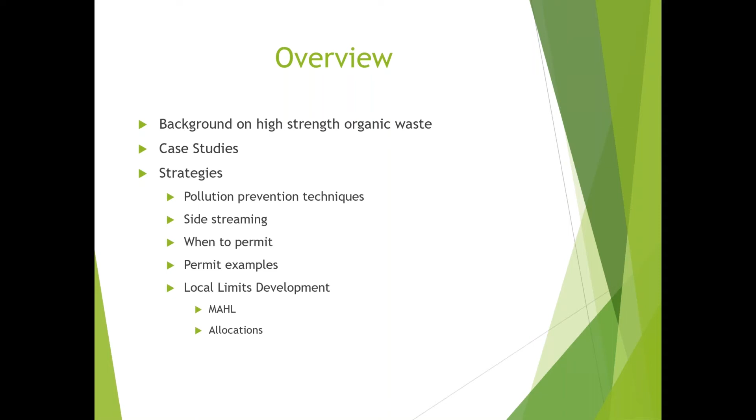All right, being serious here, this presentation is not to tell you what you must or must not do. It's just to provide you with some insight in order to help you better understand the impact of your industrial users on your system. It's your decision on how you handle or provide the oversight of the system. And again, we're not here to create policy. My talk reflects my personal position and not necessarily reflective of EPA's position.

So, get a couple little background slides out of the way here. Is the discharge a significant industrial user? Well, for most of the audience, and hopefully all of the audience, you've seen this about 4,000 times right now. Is the industry subject to categorical pretreatment standards?

Ironically enough, the industries we're talking about today, dairies, they're subject to 40 CFR 405, fruits and vegetables subject to 40 CFR 407, maybe there's a seafood processor, 408, feedlots, 412, and the slaughterhouses fall into 40 CFR 432. However, when you go back and look at all those regulations, although there may be an effluent guideline for that particular industrial sector, neither of those actually have pretreatment standards.

So technically, they're actually not subject to the categorical pretreatment standards, even though they meet the definition. Okay, so then we jump to this 25,000 gallons per day. I typically tell people to just throw that right out the window. You've got industries that discharge at 20,000 gallons a day, which is obviously less than 25,000, but yet they have a heavy load to the treatment plant. So throw the 25,000 out in most cases.

And also the third one here, the 5% of the hydraulic or organic loading. I was talking to someone the other day about this, and they said, well, they only discharge probably 3 to 4% of the organic loading at the POTW. And I said, okay, well, that's great, they don't meet that definition. But how many other breweries in town also discharge 3 or 4%? And so if you have 5, 6, 7 breweries, or dairies, or any high strength waste dischargers, multiply that times 3 or 4, and you're upwards of 30% of the organic loading at the treatment plant made up of industries, but you choose not to regulate them or provide oversight because they technically don't meet this definition of 5%.

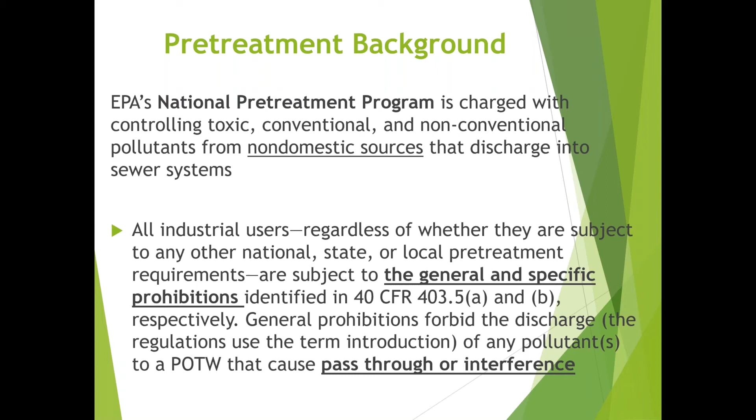All right, I'm done with the 403 references and slides now. If I show another slide or reference 403 here, just reach right through the screen and just punch me right in the face, okay? Please do that.

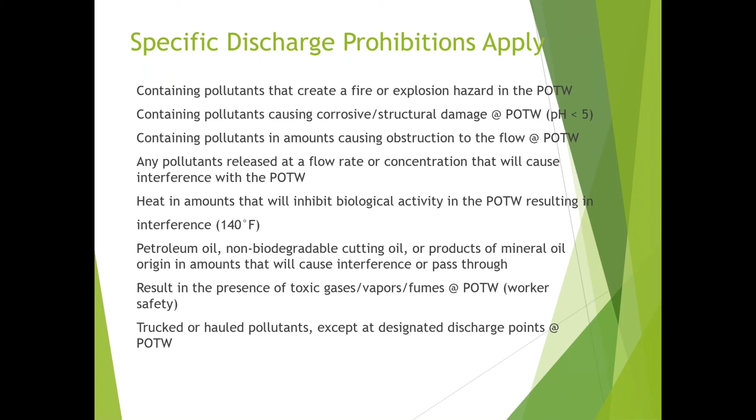Regardless of whether or not they are a significant industrial user, the specific prohibitions all apply. And I'm not going to go through these. You know where to find them. Bang, back in 403. Again, all industrial users are subject to the specific prohibitions.

So the $1 million question here I get all the time is, should I permit this industry? And my very simple, easy response back to them, and it's very sarcastic, is to say, how the heck should I know? You just asked me should I permit the brewery, or should I permit the dairy, or should I permit the slaughterhouse? So the long answer begs to go back to many questions, which I start to pose to the POTW.

And first and foremost is, what are the BOD and TSS concentrations at the industry? Do you know that? And they usually say no. Okay, so I say, well, if you don't have any data on them, what are they expected to discharge? So these are questions that you need to ask yourself. Do they have a brother or sister facility across the state or somewhere else you could use as a baseline for some of the loadings?

Have they ever sampled them? Have they ever submitted any monitoring data or any information as to the characteristics of the waste stream? Have they submitted a permit application to identify any other waste streams? Do they have any P2 measures in place? I can go on and on and on. Does the industry have any wastewater treatment in place? And if so, is that acceptable? If you do have any data on the industry, is the industry complying with your industrial local limits? Do you have local limits?

And then, once we get off that kick, I start asking them, well, how about the POTW? How are they performing? Can you handle the loading that this industry is going to give you? Are you meeting all your NPDES permits for your conventional local limits? More importantly, are you approaching 85% of the design capacity at the treatment plant? Because guess what happens when you reach 85% of the capacity? That triggers the city to develop a facility upgrade plan.

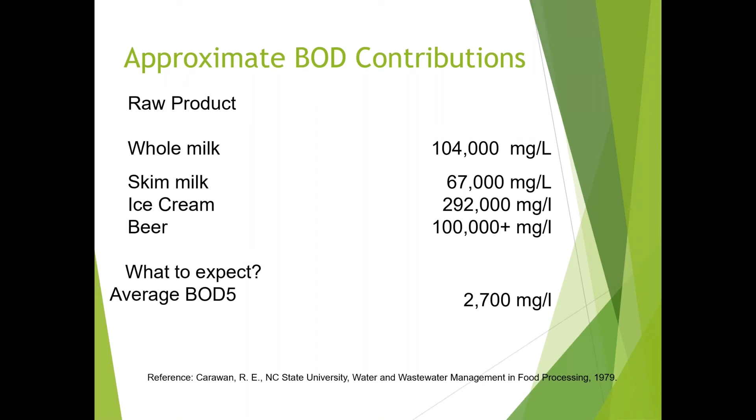But typically what you could expect from a high strength waste discharger on average with good BMPs in place, roughly 2,700 milligrams per liter. But again, that's going to be all over the place. What are your impacts to the wastewater treatment plant, the infrastructure, et cetera? You know this better than I do. High influent BOD, TSS, the process upsets, odors at your facility, increased costs. That's the huge one right there.

How about the blowers in the aeration basin trying to keep the DO levels up? Electricity is the #1 cost at the treatment plant. And then last, but certainly not least, the possible NPDES permit violations.

My kids have been watching Ghostbusters all weekend long, so tribute to them.

I sit here and say, who are you going to call? EPA enforcement, because that's what happens, right? EPA enforcement is going to come, or the state is going to come down on you. When you violate your NPDES permit, chances are, unless it's directly impacted to the industry on a potential pass-through interference, they're going to come after you.

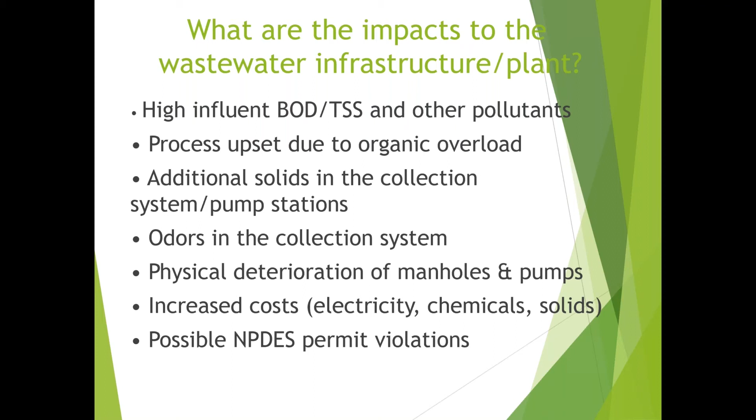Valley Crest Foods here was regularly discharging wastewater to the sewer system that caused disruptions at the POTW. The creamery processed raw milk, turned it into finished milk product. They had clogs in the lines. Occasionally they would drain these clogs and slug loads would go to the POTW. The facility was regularly discharging these slug loads that interfered with the disinfection process at the treatment plant, causing elevated

bacteria levels, to no one's surprise, violating the NPDES permit limit, and apparently on several occasions, the level of bacteria in the river was enough for the public service announcements to basically say, avoid the river altogether. And ultimately, the facility pleaded guilty to 4 counts of violating the Clean Water Act and had to pay a fine of $20,000 per violation.

So, quick case study here. This is Charles River Water Pollution Control District, and they're in Massachusetts. Somewhat older photo, but great time of year here. We have lovely foliage in New England this time of year. They are a 5 MGD design plant, so obviously the flow is a little less than that.

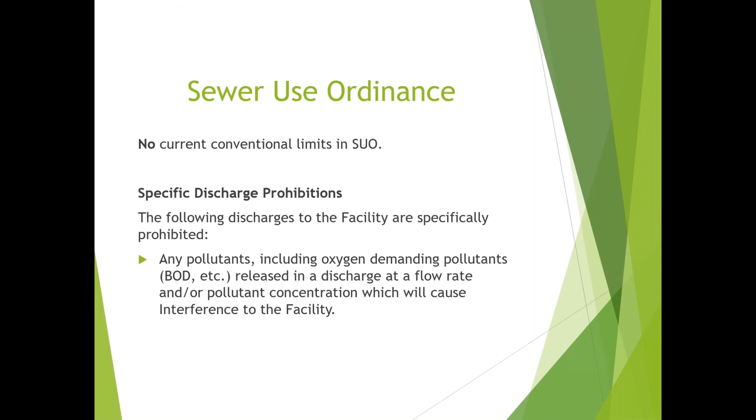So anyway, they didn't have any current conventional limits in the sewer use ordinance. They did have this language about the following discharges at the facility are specifically prohibited. It talks about BOD, etc. And here's some more information on the industry. It's about 450,000 gallons a day they were permitted for.

And note here, they did have an old standing CBOD limit in the permit for years and years of 2,000 pounds per day as a daily max and 1,000 pounds per day as a weekly average. So they did have a permit limit for CBOD.

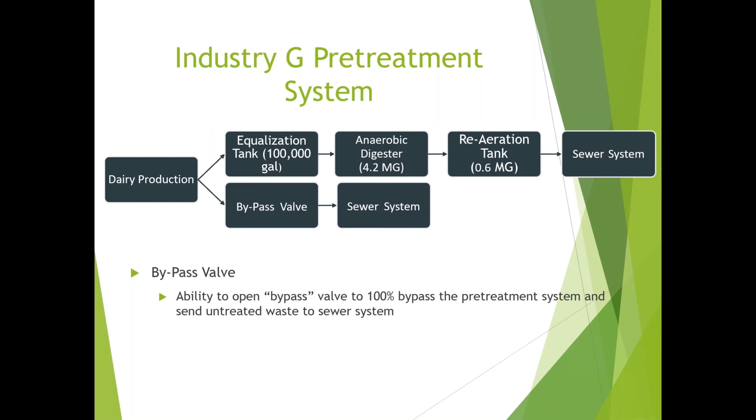This is an interesting slide because this is the dairy production wastewater that went to an equalization tank, anaerobic digester, re-aeration, and into the sewer system. But you see, they had the capability of going to this bypass valve and then directly to the sewer system. So that's always something to look for, and that kind of was an escape at the end of the day here due to the circumstances. But when you're doing inspections, you should also look for that, follow the sewer lines.

So timeline of events. Back in August of 2018, this particular industry, a dairy, had an identical plant across the state of Massachusetts that closed and decided they were just going to move all their operations to another plant, probably an hour's drive away, but decided they weren't going to tell the POTW. So almost immediately, the district started to see an impact at the treatment plant, high influent loadings. District put them on a compliance schedule.

Again, this goes real fast. Within a month, the industry had issues with the pretreatment system. They couldn't keep up with everything. To no one's surprise, there were odor complaints from the residents. The Mass DEP went out there and did an inspection and noticed that the digester had settling and gas buildup problems, etc. The industry immediately requested to open the bypass valve for up to 3 days, which would have essentially bypassed all treatment and sent raw dairy waste right to the sewer.

And the district, good for them, said, hey, we can't handle this untreated wastewater. No way. That's your problem. If you can't handle it, you got to find a way to treat it. So it didn't take very long. 2 days later, the gas digester membrane ripped, causing the sludge to overflow the tank and requiring them to unfortunately go to full bypass and send the raw dairy to the district.

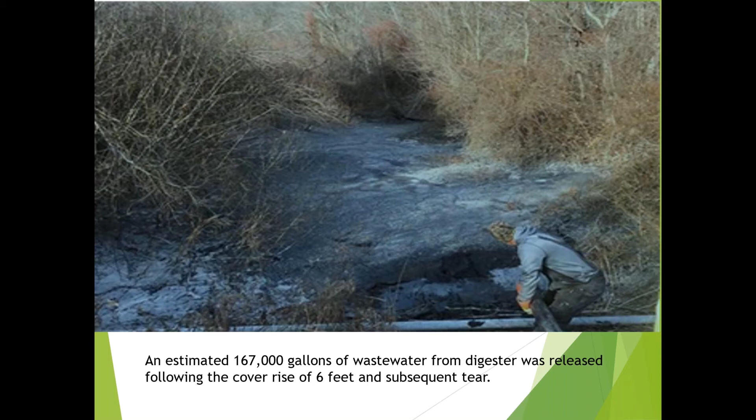And here's a picture of about 167,000 gallons of wastewater from the digester that was released following the cover rise of 6 feet and the obviously subsequent tear. So they got in big trouble here from the DEP. Why did this happen? Well, obviously many reasons.

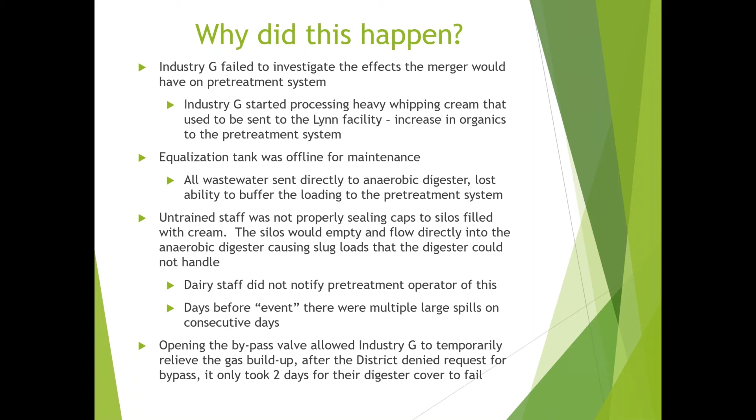The first, the industry started processing this heavy whipping cream that used to be at the other facility, increasing organic loading to the pretreatment system. The current system was not equipped to handle it. Ironically enough, the equalization tank was offline for maintenance at the time, so all wastewater was sent directly to the anaerobic digester, didn't have a chance to equalize, mix, lost that buffer ability, and they didn't have any training at the facility. They were just used to handling simple dairy waste. The dairy staff didn't notify the pretreatment operator of any of this, and obviously the membrane tore.

So the impact at the treatment plant, the aeration capacity was maxed out. I put the dollar signs in there. That's huge. Again, we go back to the increased cost at the POTW. The district was also wasting from the primary and secondary clarifiers, had to send off extra sludge disposal, extra trucks, added chemical, ferric chloride, and hydrated lime. Cost.

Surprisingly enough, the district was able to maintain compliance with this NPDES permit through this entire process, even though the BOD was at 148% of its design capacity. And as you see from the slide here, the industry alone was exceeding the district's design loading. So it goes back to show you about the design loadings and whether or not they're true and accurate.

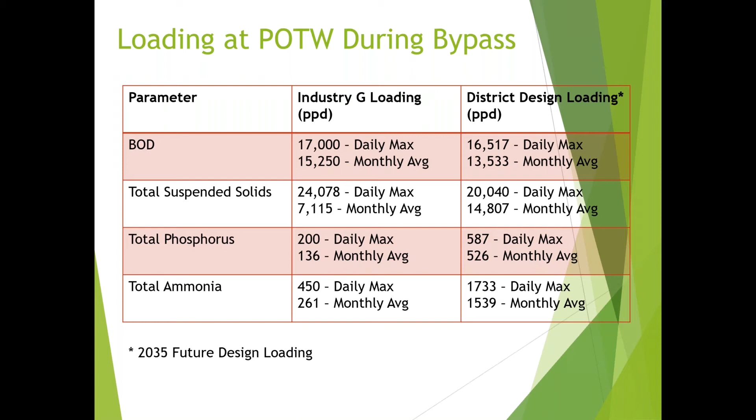But really, the only reason they didn't violate their NPDES permit was because it was in the November, December timeframe. Had it been in June, July, August, they would have had more stringent summer limits and probably would have violated those limits. So anyway, quickly, the district amended the permit to reflect the new sampling location and a bypass valve. The industry received approval to start adding hydrogen peroxide, to aid in the DO consumption, etc.

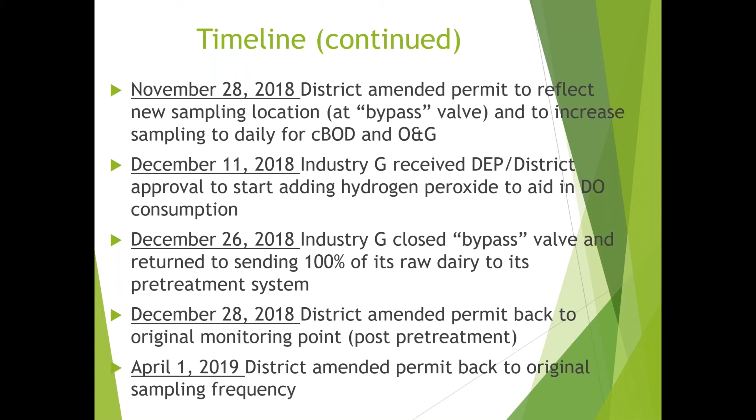And through this whole thing, they had 72 industrial permit violations during the period of November to January, and notification violations as well. And I'm going to go a little faster through this because I want to get to some of the other stuff. Ultimately, there was a settlement.

The key thing to note here is that there were 72 permit violations at $5,000 per day per violation. The POTW had in its sewer use ordinance language which stated they could charge up to $5,000 per day per violation. And they decided that they were going to go full bore with that, not take in $1,000, $2,000, $3,000, but go to the full $5,000 per day per violation. So 72 violations times $5,000 came out to $360,000, and they had a final settlement of $215,000.

So there was tireless enforcement here with the POTW. They relied heavily on the permit, the sewer use ordinance, the enforcement response plan. They used EPA and Mass DEP as assets. Another take-home message here for smaller POTWs is to continue to work with your enforcement staff, your city, town attorneys. You don't want the first time that you're meeting them to be when you have an enforcement action. Get familiar with them. And of course, there are many actions that were taken as a result of this industry.

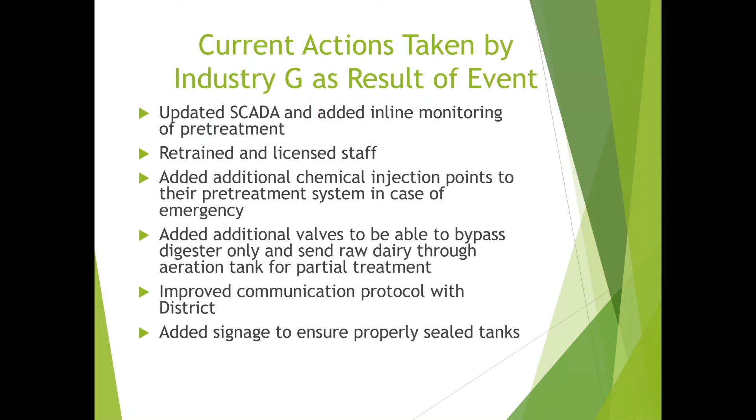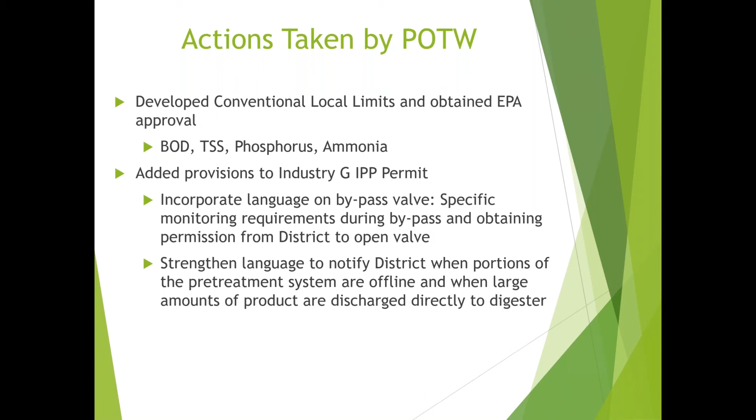Now, within the past year, the POTW has developed and has obtained approval for BOD, TSS, phosphorus, and ammonia, added certain provisions into the IPP permit. And again, I want to give full kudos to Kristen Liz out at the Charles River District. This was a very unfortunate incident. They handled it very well in a very timely manner. Totally unexpected. They were going down uncharted waters with this enforcement action, handled it very well, and got a $215,000 settlement out of them within a matter of months. So kudos to the district staff out there. And many lessons learned here, as you can imagine.

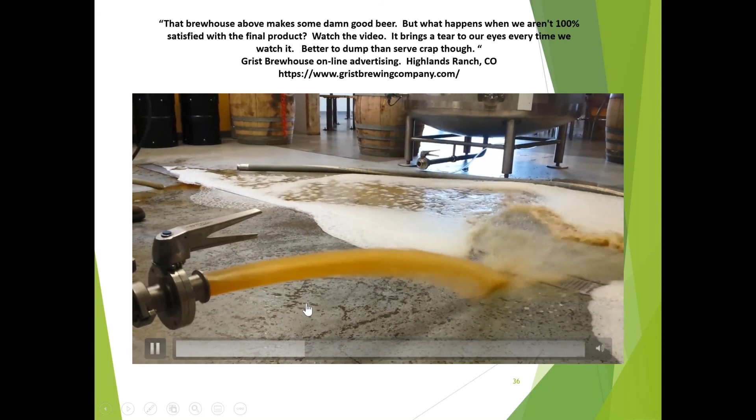So what's the big deal with breweries? I want to switch direction here, going from the dairies over to the breweries. Well, I'll show you this quick little video here. I don't think you're going to hear the sound, but I'll play it through anyway. You can read the caption here. Good friend of mine out in Colorado, Kurt, thank you for sending this out. Much appreciated. This is public information. This is no insider information here, taken straight from the brewing company's web page there. And I think there are many take-home messages here.

This particular industry was so concerned about making good beer. They said, it brings a tear to my eye every time we watch this. It's better to dump than serve crap, though. I've watched this like 5 times and I'm still chuckling every time I see it. I think, again, when you look at this, you have to say, who's the public relations person for Grist Brewing Company over there? I'm pretty sure that the facility was totally unaware that maybe one day some guy from Boston at EPA is going to be showing this video over a webinar to over 1,300 people about how I'm dumping raw beer down into the sewer system.

So I hope that they had effective pretreatment in place. I hope that that wasn't sent to the POTW directly. I hope that the POTW didn't experience any pass-through interference. But it really highlights the need for education on these significant industrial users. I would never want this to happen at my treatment plant. And again, so I ask you, should I permit the breweries? Well, if I have raw waste coming down my line of roughly 100,000 milligrams per liter, I think I'd probably want to regulate them, because there's always the potential for pass-through and interference.

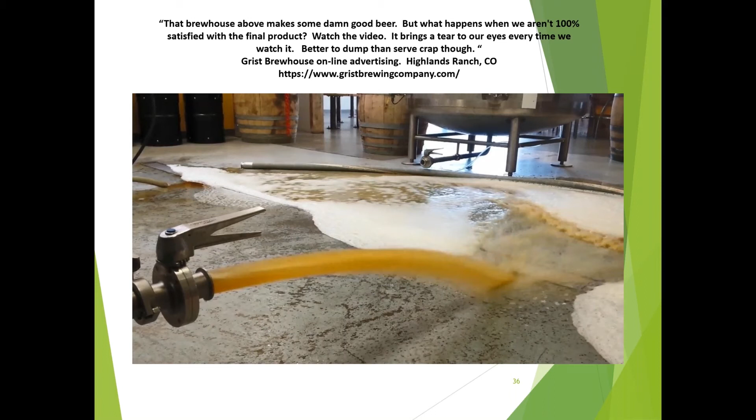So I'm not going to get into the step-by-step process here about brewing. I just did want to give you a little bit of a flavor of how the process works. Most of your side streaming, et cetera, is going to come from the mashing operation. That's where the milled grain is mixed with hot water in a large vessel, commonly referred to as a mash tun, where it's converted into a sugar-rich liquid, or wort. The wort is then strained off. Then you have boiling. The wort is moved over to a larger tank known as a kettle, where it's boiled again with hops, sometimes you'll add some other ingredients like herbs or sugars, and then it's over to fermentation and ultimately packaged and hopefully not dumped down the drain.

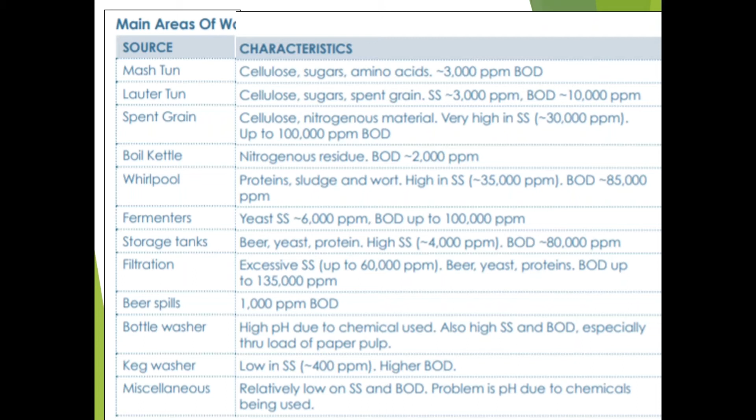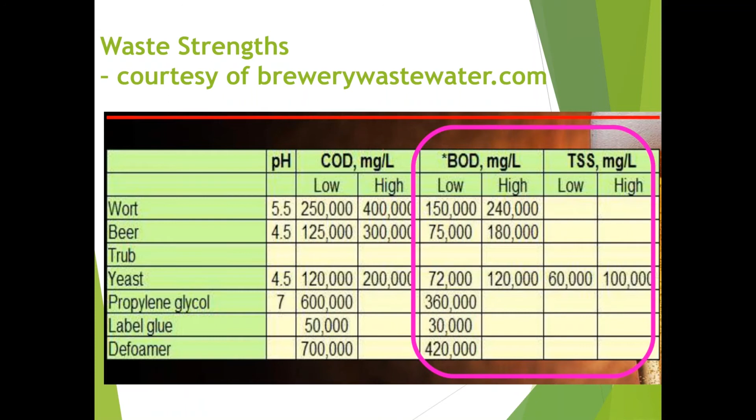And here's just really a slide to give you a flavor of where some of the high strength waste might be coming from during a brewery process. And again, this is from brewery wastewater. I want to put a few slides up here to show you where we are with respect to the high BOD concentrations. Beer, 75,000 upwards to 180,000 milligrams per liter. With side streaming, it's a very effective way to knock down that BOD, and mainly the solids.

Look at the solids level that come way down. BOD too, but it's really the solids. And this is data from Warwick, Rhode Island. Thank you, Betty Ann, who sent this over to me. This is real data from a real POTW. You see the pH numbers there, fermentation, wastewater results.

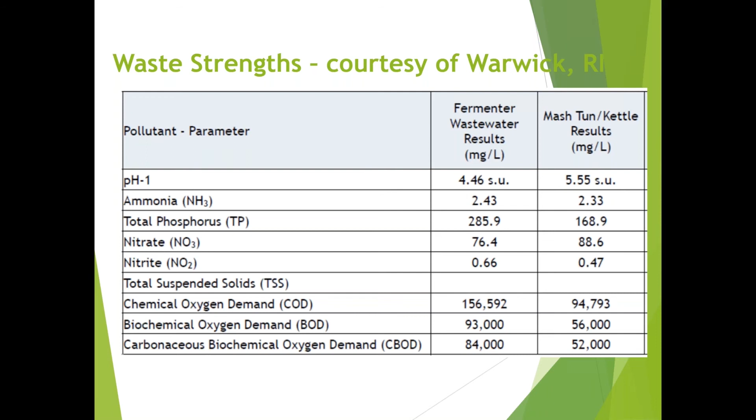Again, this is not going to the sewer system, but this is basically beer that is in process and sampled for BOD, but tells you that in the event that it were dumped down the sewer, that's what the numbers would look like. Again, BOD, CBOD, 50,000 to 90,000, very, very high numbers.

And I know we're getting low on time here, but I do want to show this video because I worked with a couple people at EPA. Thank you, Chris Beeling and Marco Rivera, who helped out with this video. And it's a video that was put together about a year ago now. And Laura, if you could get ready to load that up, that would be great. Whereby we went out to 3 or 4 breweries. It was probably one of the best weeks of my life ever working at EPA. And hopefully I'll tell you to turn the sound up here. And we put together this 7-minute video.

They say the camera adds 20 pounds to your face, and I certainly don't disagree with that after watching this several times.

But it's really a great video on side streaming, okay? And getting that waste out of your tanks, etc., in strategic ways, and also effective wastewater treatment. And I'm going to show you some examples, particularly the Alchemist video or process where they get down to incredibly low numbers. So Laura, if you could just play this video, that would be great.

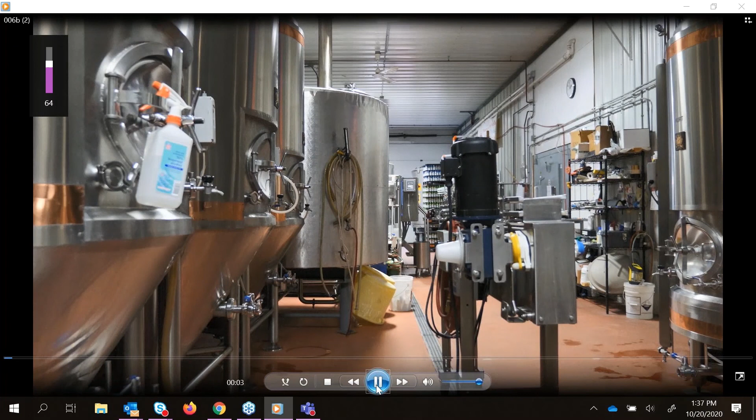Available capacity to handle high-strength wastes. Many cannot accept a large amount of brewery waste and still provide needed treatment services to the rest of the community. The municipal wastewater treatment facility is crucial in protecting Vermont's surface waters. They're the one receiving and treating this wastewater and discharging it to the river itself. So food and beverage manufacturers can indirectly impact Vermont's surface waters if they adversely impact the wastewater treatment facility. Our effluent from the brewery goes to the Stowe wastewater treatment facility. They discharge to the Moscow River, which leads into the Waterbury Reservoir, which discharges into the Winooski River, which goes directly to Lake Champlain. So even everything that we do here, we feel is part of our responsibility for the health of Lake Champlain.

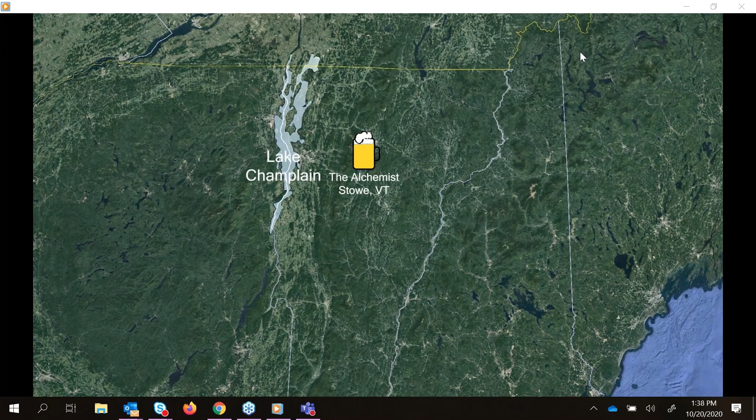So when you're designing a brewery, one of the things that a lot of people kind of step over is wastewater generation. You know, for us being in South Burlington was important because this is where our community was, this is where the brewery started, this is where our roots are. Wastewater facilities, the way I look at it, is a resource. If we have a facility that's discharging into our treatment facility, but they're not using best management practices, they're utilizing a portion of our facility that could be used as a resource for another facility to come in. When we first started, we didn't do anything. We just put everything out in the drain. That came to an end quickly when the local sewer treatment plant was in trouble. The brewery industry has become a fast-growing sector, and EPA is encouraged to see that many breweries have adopted best management practices in order to control high-strength organic waste from being discharged into our municipal sewer systems.

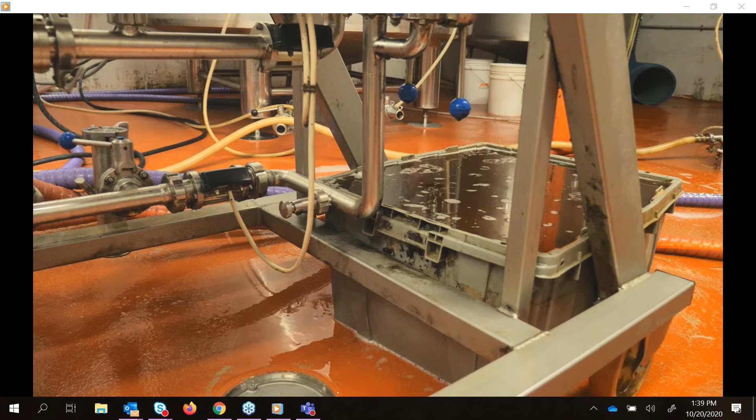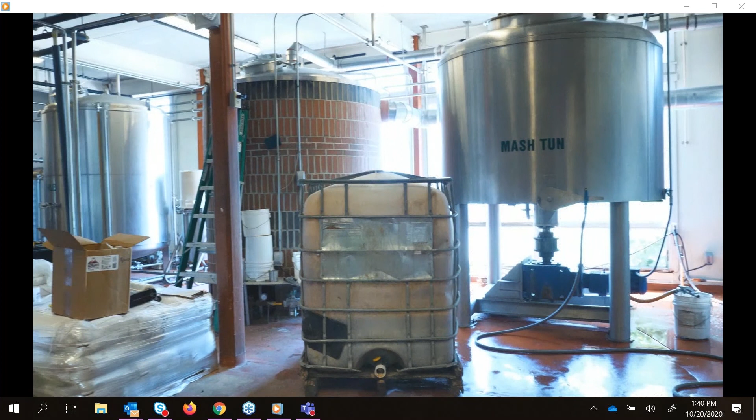And we're just careful about a real culture of trying to use as little water as we can. No beer goes down the drains. We recycle all the cleaning chemicals that we use, so we use them over and over again. Big bulk that's left over from the brewing process, of course, is the mash. When you take spent grain out of the mash tun, we load it into a trailer. It gets picked up on Fridays, and then goes to a dairy farm for the milking herd of some local farmers. Other parts that are left over is the yeast and also some of the hops that cows just don't like. So we put those in totes and we bring those to a local composting facility right in town here. Scott is describing side streaming. Side streaming keeps processed waste separate from wastewater. The wastes are then reused or more efficiently managed.

BOD, or biochemical oxygen demand, is a measure of the organic content in wastewater. An average American household produces wastewater that has a BOD of around 300 milligrams per liter.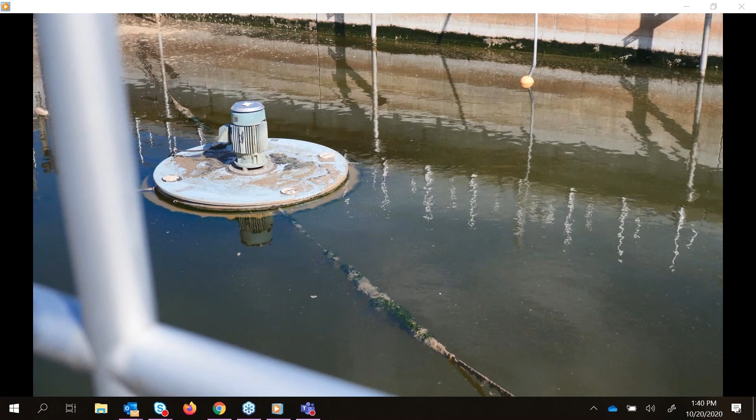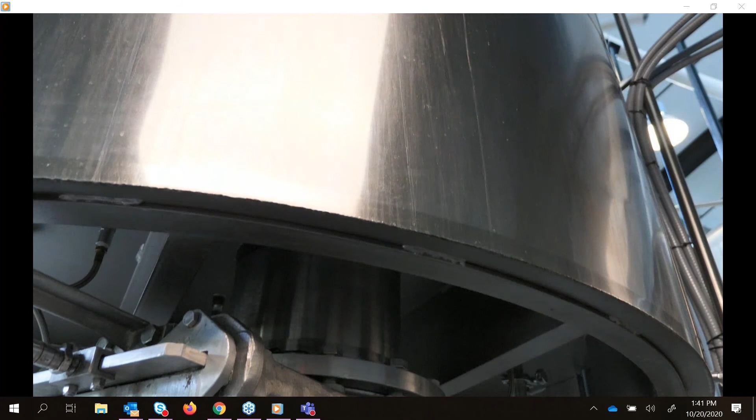Just before we started all of our side streaming at our Waterbury Brewery, our BOD load going down to the town of Waterbury was about 20,000 milligrams per liter. After really working on our side streaming and getting as much out as we possibly can, we average around 1,500 milligrams per liter. And that's strictly just side streaming, being very crazy about catching every drop of beer, all the yeast, everything we can. We catch it and get rid of it beforehand.

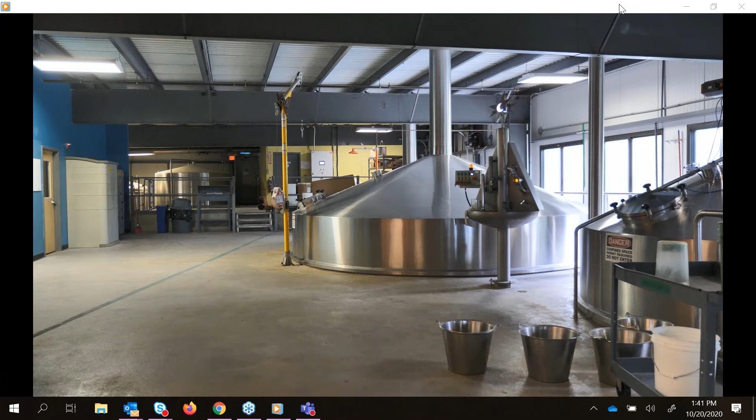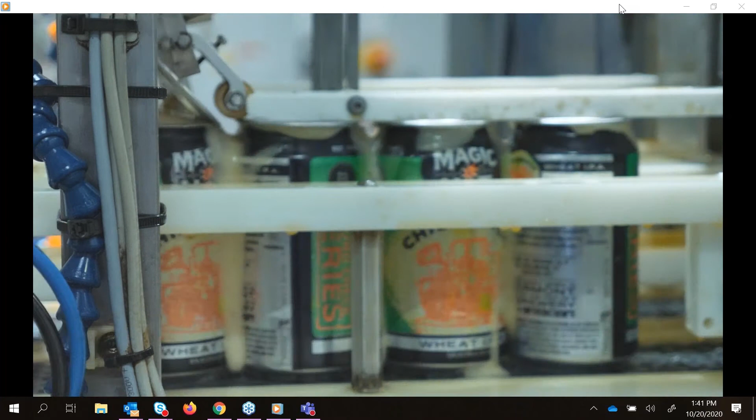Side streaming sometimes solves one problem but creates other challenges. So side streaming was a great process for us, but the amount of waste we were generating would necessitate a truck coming to pick up the rollaway tank every 6 to 7 hours, and that was just for our liquid waste. So when you add on another truck coming to pick up your spent grain every 8 to 12 hours, you're getting 4 to 5 trucks a day in and out of the brewery every day we were in production. So as production grew, that traffic flow was increasing.

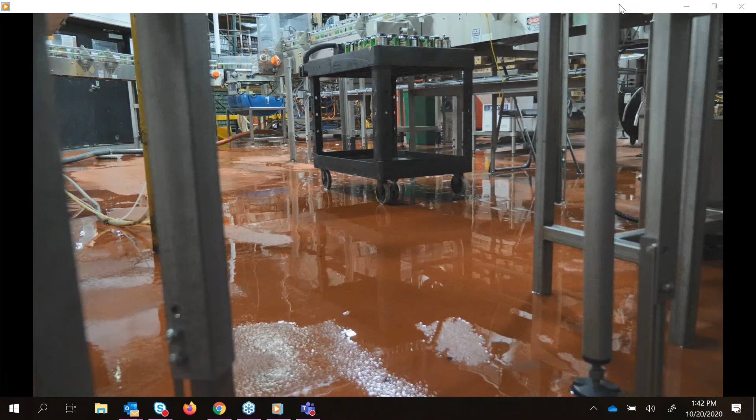Chris solved his process waste problem with an anaerobic digester. Anaerobic digesters make meticulous side streaming less important because all high-strength wastewater goes to the digester, where bacteria convert the organic material in the waste to methane gas, which can be used for heating or electricity. The pre-treated wastewater is then sent to the municipal wastewater treatment facility.

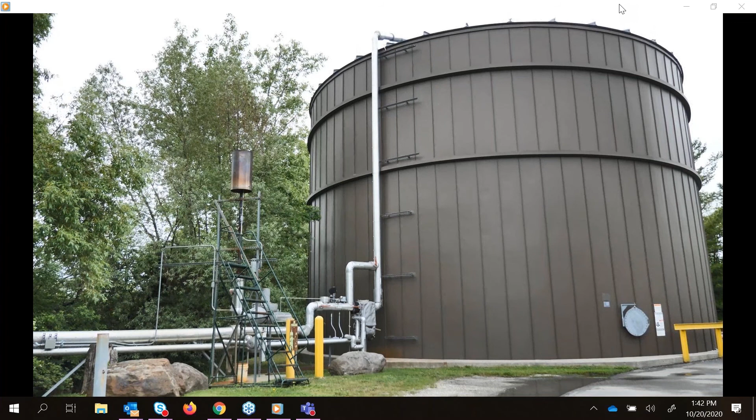So the anaerobic digester provides a number of benefits, not the least of which is a business benefit for us. We're able to eliminate the trucking cost of side streaming all of our waste, and we're able to cut our electrical costs by 60%. So those net up to a big savings for the brewery.

Spent grain can be hauled away and used as feed supplement for local animals and farms. And the dewatering process of the digester also creates a wonderful nutrient-rich fertilizer that we can then use for local farms as well.

Bioreaction, sometimes called aerobic treatment, is a more traditional means of treating wastewater. It works by providing oxygen to microorganisms to help them break down organic wastes. It can also help remove phosphorus and other pollutants.

The Alchemist uses this type of system in Stowe, Vermont. At our brewery here in Stowe, we practice all the side streaming that we do at our Waterbury brewery, with the exception being that we have an aerobic bacteria digester here in Stowe. So the digester needs a certain amount of BOD and strength coming through to support the aerobic bacteria.

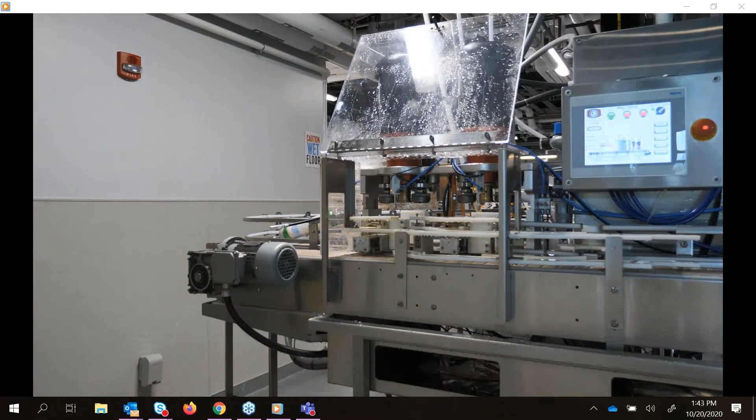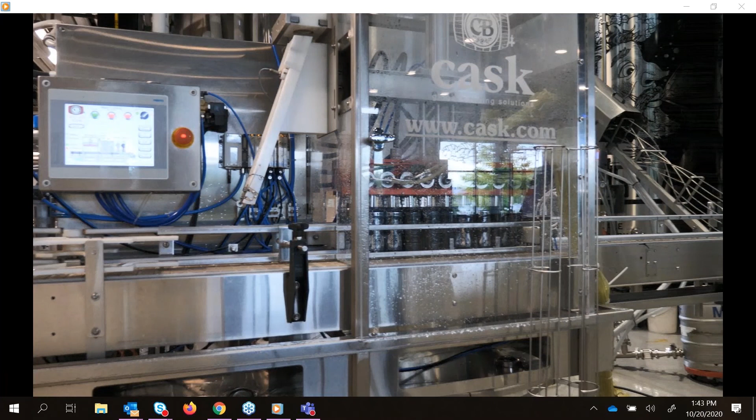So there are certain points along the line in Stowe where we don't practice the same extreme side streaming as we do in Waterbury. So our effluent coming into our wastewater pretreatment system will run about 4,000 milligrams per liter BOD, and by the time it's leaving the wastewater treatment system and going to the town of Stowe, it's down to about 0.2 milligrams per liter of BOD. That's over a 99% reduction of BOD. 0.2 BOD is about 1,500 times less than an average household discharges.

As far as the BOD levels go, the town's wastewater treatment system is getting surcharges, or just disposal charges, of over $80,000 to $100,000 a year because of our discharge, which they were happy to share with us. And so we were paying $80,000 or $90,000 a year.

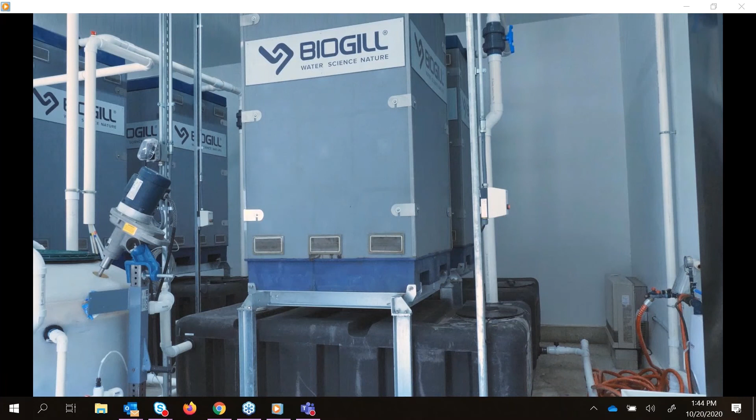So Scott began to side stream, but he still had to pay $60,000 to $70,000 a year in surcharges. He then invested in a pretreatment system and eliminated the surcharges. We've been able to get the BOD levels down to under 300 consistently, sometimes under 200. So the system will probably have about a 6-year payback for it.

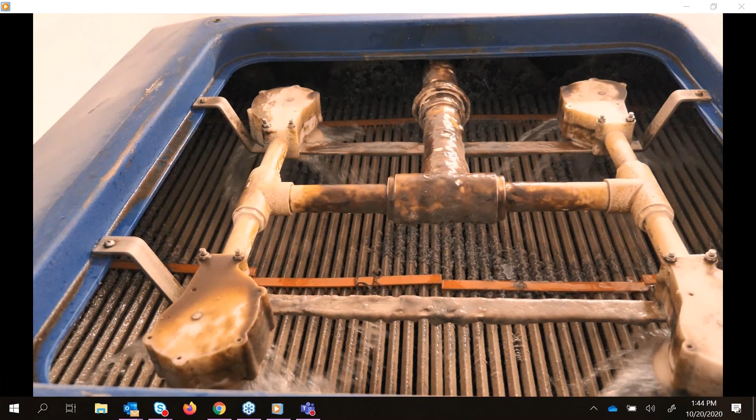In addition to high BOD, breweries can discharge large amounts of phosphorus, leading to harmful algal blooms and low oxygen levels that can harm aquatic ecosystems. We're having a real issue in Lake Champlain, our large lake, with algae blooms, and a lot of that is contributed to excess phosphorus. So our system here, we're removing 96% of our phosphorus load before it goes down eventually to Lake Champlain.

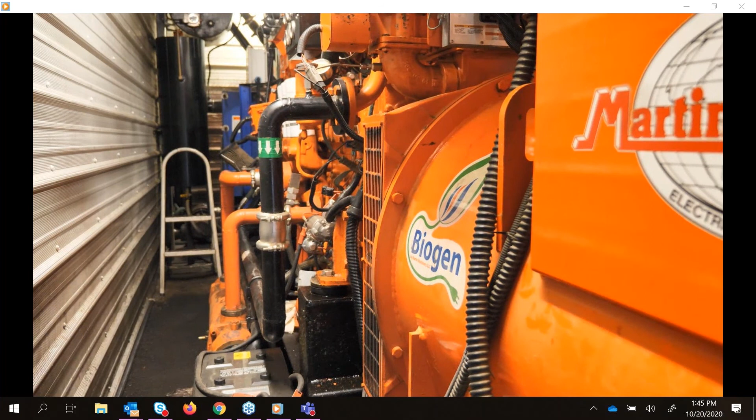Pretreatment programs work to regulate breweries and other food and beverage processors and ensure their wastewater streams can be safely and effectively treated by the receiving facility. The pretreatment program relies on partners to reach any entity producing or discharging high-strength waste. And we use partners such as the DEC's Environmental Assistance Office, the Vermont Rural Water Association, the EPA, and municipalities.

Craft breweries find themselves in the vanguard of an entrepreneurial environmental movement in Vermont, New Hampshire, and around the country. They are reducing their high-strength wastewater while finding markets for their waste products. These breweries then help keep America's surface waters clean while providing their unique innovations on an American tradition.

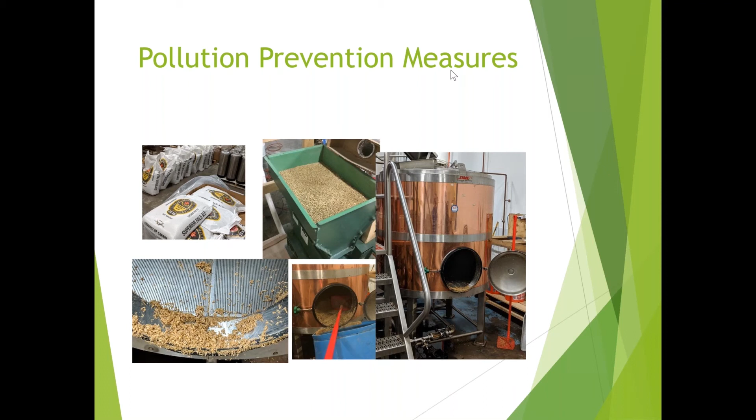Okay, so brewery wastewater makeup, what is it really made up of? What are we really talking about? It's the cleaning of the tanks, equipment, and the floors. Most of the wastewater coming from the brewery operation is going to come from the clean in place, otherwise known as the CIP process. Typical CIP process is a hot water rinse, and it could be all of these tanks we're talking about, the mash tun, the kettle tank, the lautering, the fermentation tanks, all of those tanks. With FDA regulations, etc., they need to have extreme cleaning measures in place.

So hot water rinse, followed by typically another hot water rinse with a caustic, that's where the high pH comes in. You'll have another rinse with a sanitizer, that's your acid, you have another low pH. And then since it's low, you need to hit it with another caustic on the other end. So you're getting these fluctuations on the high and the low pH, in addition to the leftover BOD, solids, and organic loading that's there.

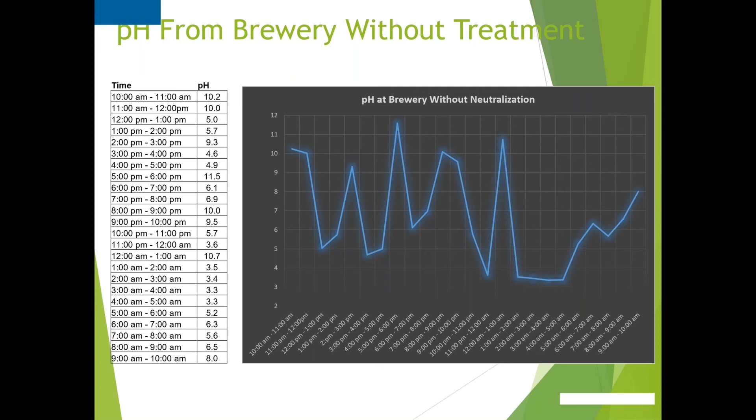I want to slowly wrap this up here as we start to talk about permitting strategies. This really goes back to you. Are you going to permit these high strength waste facilities as an SIU? Maybe. If they're an SIU, remember they need to be sampled, permitted, inspected at least once a year, monitoring data to the frequency that you put in the permit, etc. They must comply with all your local limits. There's another option, you could permit them as just an industrial user with lesser requirements if you feel like they're a good actor or an actress.

And you don't want to go out there on a yearly basis, etc. You could require BMPs, side streaming, which we just talked about, solids management, and then there's agreements or allocations.

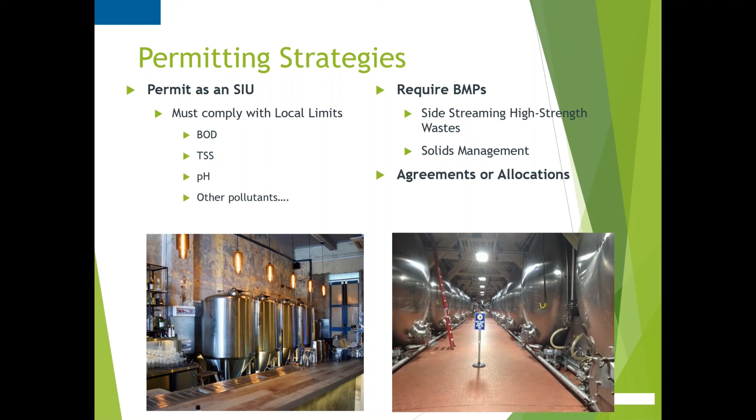If you're a small program and you're thinking, well, the town manager or city mayor, or whoever it is, the board, select board, aldermen, really don't want us to permit them, but we have this agreement in place to allocate X amount of loading to the particular industry. Well, that's fine too, as long as they don't exceed that allocation. Because what happens when you exceed that allocation? There's a potential for you to violate either an NPDES permit, or you come close to the 85% design capacity at the treatment plant.

So just some things to think about as we shift gears a little bit into the development of maximum allowable headworks loading and local limits. This is a separate course completely on its own, so I'll hit it really quick.

The MAHL is really just using real data to back calculate in order to find an MAHL to determine the most stringent criteria, whether it be water quality, sludge quality, NPDES permit, worker health and safety, etc. In a traditional setting, that's how it's done. But for BOD and TSS, when you develop maximum allowable headworks loading, you do use design loading at the POTW. You're not designing an MAHL for BOD or TSS based on the NPDES permit. If you design it based on the NPDES permit, it will be way overly too stringent. You need to use design loading at the treatment plant.

So I ask you now, again, by a show of hands, how many people know what the design loading is at the treatment plant? And then how many people actually believe that your design loading is truly accurate? Because whatever your design loading is, or even design flow, what happens when you have heavy rain events? For us in metropolitan areas, we have CSOs. And if your average flow is 10 mgd, your design is 20, but yet you've got 100 because we had a 4-inch rainstorm, but yet shockingly, you never violated your NPDES permit.

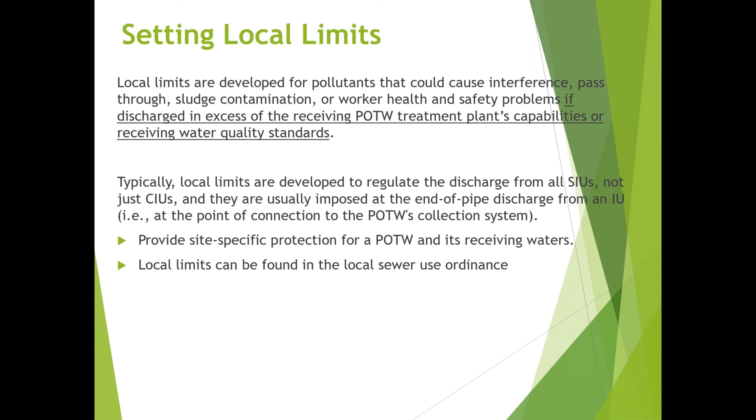So if you're going to do 4 or 5 days of sampling, don't set your influent and effluent sampler up for the same time. Don't set the influent up at 5 o'clock or 7 o'clock on a Monday morning and the effluent at 7 o'clock on the same day, because you're not going to get an efficient removal efficiency. And removal efficiency is what really drives these local limits. Playing around with the removal efficiency just by a slight percentage is crucial.

So very quickly, just giving you a case study here of a POTW, a 5.7 MGD design plant. I rounded the numbers up here just to give you something to go on, just to show you what numbers would typically look like in a situation you might fall into. The design loading here for BOD is 16,000 pounds. You have uncontrolled waste, that's your residential waste, your background, small commercial, 10,000 pounds. And then you've got hauled waste. Don't forget about the hauled waste, unless, of course, you don't take septage and you don't take hauled waste, then you don't have to worry about it. But in this case, we're going to account for the hauled waste.

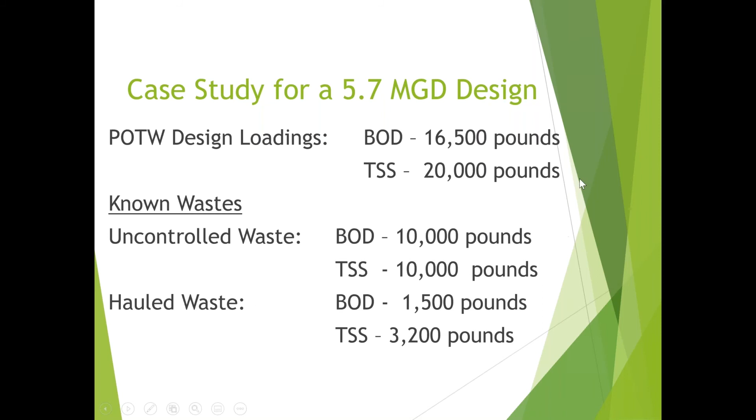So we take our 16,500 pounds per day, and that's our MAHL. We're going to use a 10% safety factor. Again, you can use 15, you can use 20. I'm just using 10 here. That's your choice.

Going to subtract off our 10,000 pounds of uncontrolled waste, our 1,500 pounds of hauled waste, and we're left with roughly 3,300 pounds. Some people even put a reserve or a safety factor on top of that for the sake of not being too difficult. I didn't do that, but some people put yet another safety factor in there.

So we've got 3,300 pounds of BOD, and that particular industry has requested, of the 3,300, 2,400 pounds, so 72% of that. In TSS, they're requesting 4,000 of the 4,800 pounds. So it doesn't leave you much here. If you're using this as an example, you've got only 950 pounds of BOD or 800 pounds of TSS left. That's for all the remaining industries.

So when you talk about giving away a piece of the pie, every time I think about this mass allocation or an allocation to industries, I then think of Marty Groom.

And Marty, if you're listening out there, I don't know how many times I listened to you give that damn presentation about the pie. All it does is make me hungry, and I need a slice of that apple pie.

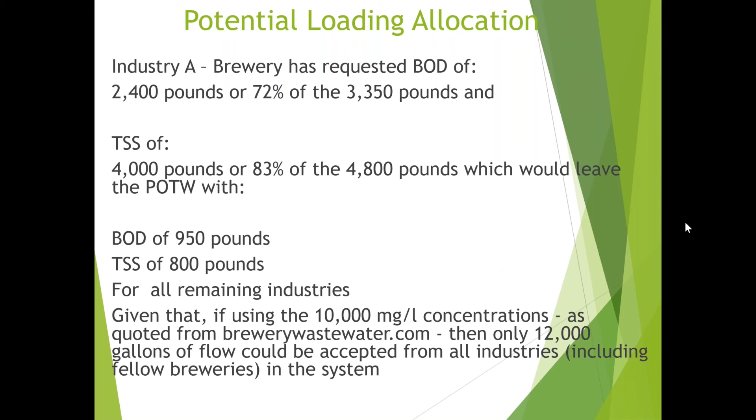But the message here is Marty says, don't give away the pie. Okay, you have to keep a little piece of the pie. And Al has a nice slide about the pie. So don't give away the pie. And here you'd be giving away the whole pie to this one industry. In this example, if we use the brewery numbers here of 10,000 milligrams per liter, and an average brewery discharges 12,000 gallons of flow, that's it. That's all you could take from anybody from here on in. So basically, you're putting yourself in a bad position there. So I highly encourage you not to give away the farm.

When we're talking about BOD and TSS, it's all numbers created. If you're going to put it in a permit, I highly encourage you to do it in pounds per day. Don't ever put BOD and TSS limits in milligrams per liter. It always should be as MAHLs are, and always adopted into the sewer use ordinance. They should always be in pounds per day.

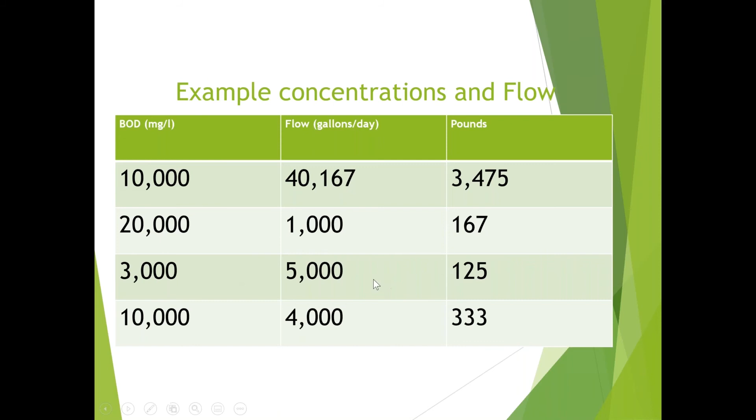So just some examples here with effective treatment. Here's a BOD, the first one there, 10,000 milligrams per liter at 40,000 gallons. You're up at 3,400 pounds per day. But if, in this particular industry, they cut the flow back by 40-fold, and yet they still doubled the BOD concentration, the pounds would be only 167 pounds per day. So more than likely, you're going to be in the third scenario. Here is a decent example of BOD of about 3,000 milligrams per liter at a flow of 5,000 gallons per day. Your pounds are going to be about 125.

And I've been to this facility. They have pH neutralization only. They don't need to put in anything beyond that. They just need to meet the pH local limits, because you know they're never going to exceed that BOD local limit of 310 pounds per day. So even though it's a very small POTW, they can handle it. So kudos to them. Another small program, 293,000 gallons per day. That's 0.29 million gallons per day.

I started drinking at 9 o'clock this morning, so pardon me if I start to slur here.

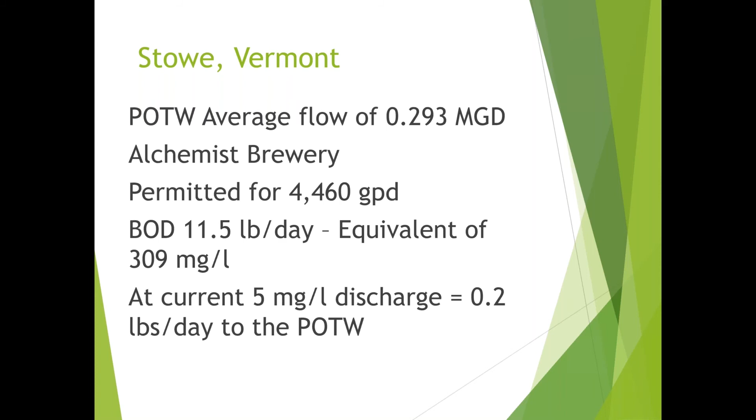They're permitted for 4,400 gallons per day. The BOD limit is 11 pounds per day. That's the equivalent of 309 milligrams per liter. That's basically residential waste. That's background. That is incredibly stringent, and that's on Alchemist Brewery. But as you saw from the video, they took it upon themselves to say, hey, wait a minute, we can even do better than that. We're going to discharge down to 5 milligrams per liter. So kudos to Alchemist for doing that. And then last but not least is Middlebury, with an average flow of about 1 million gallons per day.

This is Vermont hard cider. They're permitted for about 70,000. The BOD limit's 2,500. That's the equivalent of about 4,200 milligrams per liter. If you want to start to throw in the surcharge system, one of my last presentations, I said, what do you surcharge for BOD, and they said 40 cents per pound, and I said, okay, I'll throw that into my equation here

on my last slide. And so if you're operating at 261 days a year, you're not operating on the weekends, it's weekday only, at 40 cents a pound at max flow, that's $1,000 per day. How many industries are willing to pay $1,000 per day to discharge to the sewer system? That's $261,000 per year. So, think about that as you go to the surcharge.

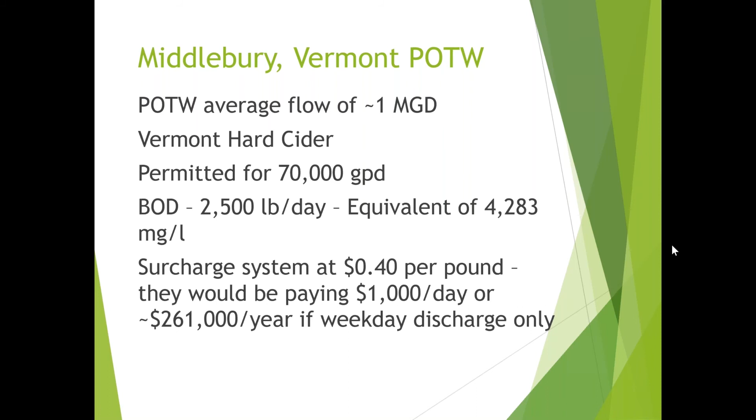And Al, hey, go Broncos this weekend. I'm the biggest Denver Bronco fan in the world this weekend. Stick it to the Chiefs, baby. Go Denver. Yeah. Hey, thank you, Jay. I want to thank my good buddy Jay. Apparently he's trying to take us into happy hour for those of you on the East Coast.

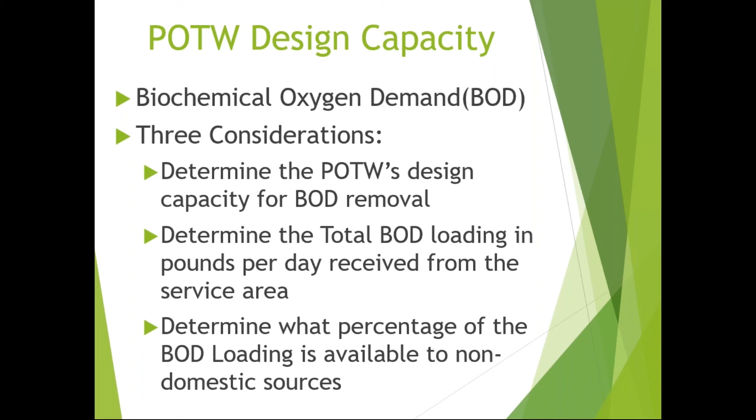So when Jay talked about that pie, we're talking about this. So in your service area for BOD, for example, you have a design loading, a design capacity that your wastewater treatment plant is designed for. You really want to know what the loading is coming into your plant. And you want to start to then delineate, where does that come from? Does it come from the domestic side, the residents? You do get some loading from the residents.

You may get some loading from the truck and hauled waste, probably not in a portion of the pie this big, but this is the only pie that I was able to find that looked kind of cool. So you want to then determine what are these loadings coming into your plant, and then that yellow piece of the pie, what is available, what's allocated to these non-domestic sources, what can you provide to them?

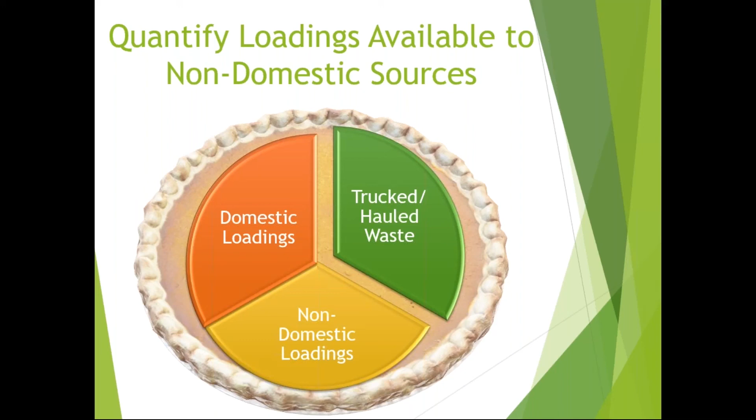And sure, you can definitely allocate these as limits, as Jay mentioned, in permits. You can definitely have BMPs based on these loadings, or you can use this as, here's some strategies that I can use. Here's some methods that I can use to protect my treatment plant. Maybe not through pretreatment-specific sort of permits, but also some decisions that you can make.

And so for surcharging, for example, you can definitely surcharge high strength waste. You have that ability as long as you establish that authority in your ordinance. You can definitely offset the cost of treating this high strength waste, whether that's coming from restaurants, whether that's coming from any other of those high strength waste sources.

What I recommend is that the municipality or the POTW determine what is that ceiling. So at what point of offsetting that cost does it become an impact? Does it start to interfere with your plant? Does it start to be an indicator of pass-through or violations of your NPDES permit?

So limits or allocations, as Jay mentioned, you can definitely do that for high strength waste, or you can start to determine, can you have some sort of alternative POTW operational methods or strategies? Can you start to divert that high strength waste? Can you receive that outside of the collection system, where it may be a benefit to your wastewater treatment plant and also provide some relief to some of the industrial users? So the diversion part of it is more of that win-win sort of strategy, both for the community and also for the POTW.

So here's some of the benefits to the POTW. Again, protecting the treatment plant and the collection system from slug loading and discharges to your plant. It gives you that ability to, instead of passively receiving this sort of high strength waste, now you can actively manage the high strength waste and manage your influent loading.

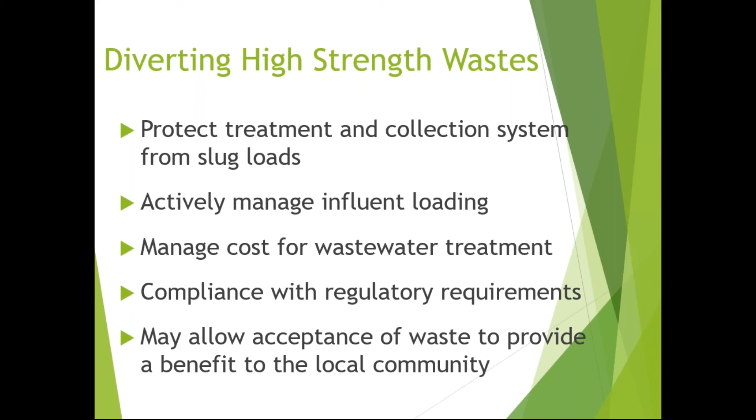And I have contacts at the end where you can follow up with some of the contacts at these cities. These guys are the experts. I'm just the conduit that's providing the information. They've done some really good things with the diversion of high strength waste. So thank you in advance to Colorado Springs, Fort Collins, Pueblo, and Casper.

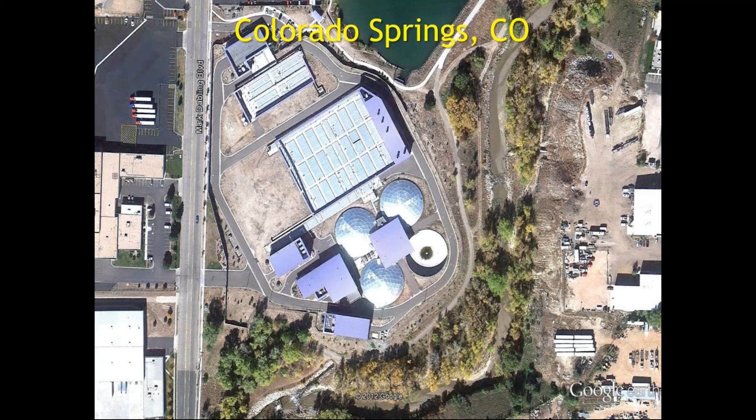And so this is the wastewater treatment plant where there is a local dairy within the service area where they have had some high strength waste that they were discharging. It's the whey waste, and they manufacture cottage cheese. And part of that is they curdle it, and then they have to rinse that cottage cheese and develop a whey waste, which is high in conventional loading. And the local dairy was paying a high cost for the surcharges, and they were trying to find an alternative.

The engineers at Colorado Springs understood that their wastewater treatment plant was carbon limited, and I'll talk a little bit for the next case study about the nutrient regulations that are in place in Colorado. The wastewater treatment plant was carbon limited, and they needed a carbon source in order to meet the nutrient regulations in their biological nutrient removal process.

So the engineers at Colorado Springs actually contacted the dairy to see if they could accept their waste as a carbon source. They found out that this whey is a good source of lactic and acetic acids, which is really important as far as that carbon. That's that good carbon that helps you with the BNR process.

So Colorado Springs had a pilot study. They did some bench testing and determined that yes, they can accept this whey waste, and they started contracting with the dairy. They received this whey waste in their grit basin tanks. This was an underground grit basin tank, and started receiving loading coming from the dairy at 5,000 gallons semi trucks.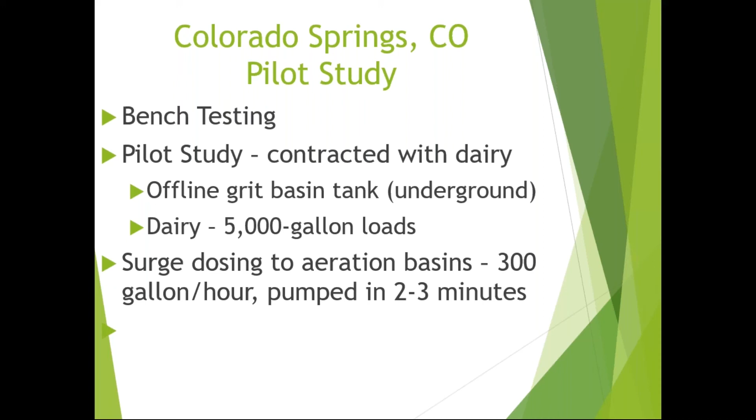And so they offloaded that into this grit basin and started surge dosing that into the aeration basins. Again, they have a primary aeration basin going to the BNR basins. So they surge dosed that at 300 gallons an hour within 2 or 3 minutes. So it was a massive surge going to the primary sedimentation basin.

They found that because this whey waste was in this underground tank, and it was at temperature, and it was getting a higher temperature, that there was some fermentation going on. They didn't realize that at the beginning, but the fermentation allowed the lactic acid that was in this whey waste to be converted over to acetic acid, which helped as far as the volatile fatty acids or the VFAs. So this fermentation discovery was by accident, but it was actually a good discovery that allowed them to determine that the surge dosing actually helped the BNR process.

So they did some lab fermentation testing to determine, okay, what sort of temperature do we need to be at? What sort of pH adjustment can we do in order to increase this conversion from the lactic acid in whey waste over to more of this acetic acid, and found through this bench testing that they're able to get VFAs at a concentration of 20,000 milligrams per liter, which was very helpful for the BNR process.

They then converted over to full scale. They thought this is a great thing, we're going to make this permanent. So they paid some cost to construct two 35,000 gallon underground dosing tanks in order to accept about 50,000 gallons a week from this dairy, and had some great benefits. One is that it replaced the cost of them having to buy acetic acid. It was a great benefit to the dairy because it helped them to offset the cost of the surcharges. And for the city, it was a stable source of carbon, so they thought they were set, and were able to help the plant process with the BNR with this good carbon source that was stable, and that provided them some real benefits.

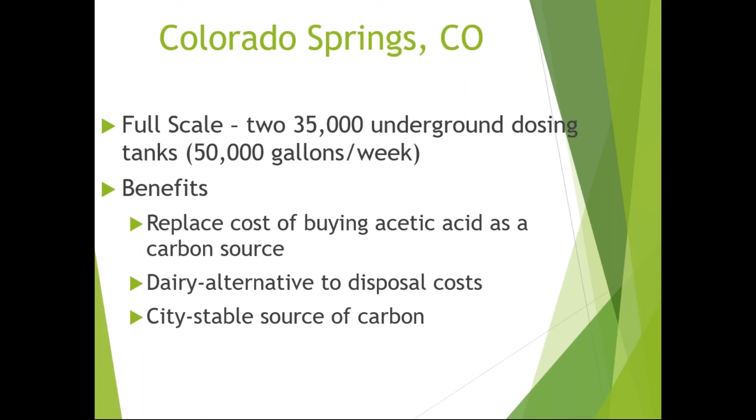Well, then COVID-19 happened. So the dairy had to decrease production, and they went from a good stable source of 20 trucks to about 3 to 4 trucks. So as a result, Colorado Springs had to supplement their carbon source and had to actually buy acetic acid. And it was a huge cost. You can see how much it costs as opposed to getting it on a contract basis from the dairy. So they're still working through those issues.

And so Colorado Springs kind of had to adapt like we all have for COVID-19, and they're now looking for brewery waste. There's a lot of breweries out here in Colorado. Colorado Springs has some great breweries, and I tried to visit as many of those as I could when I was there for an audit. They have some great breweries, but they're all smaller. And so they're trying to determine, can they have the same type of source from breweries that they're getting from this dairy, just to protect themselves in case this pandemic continues. They're also looking at their sludge blankets to ferment those, to again convert those over to a carbon source. So Colorado Springs is making that first effort into having a benefit to the community and also a benefit to the wastewater treatment plant for this source.

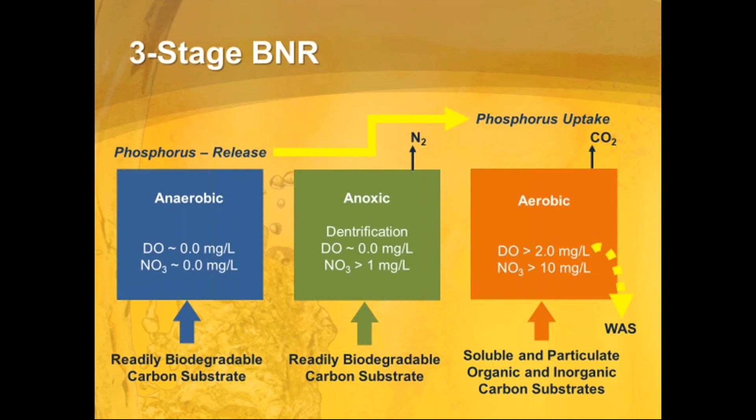So in this situation, you definitely need a carbon source. This is what a lot of wastewater treatment plants in Colorado are faced with. How are they going to get that carbon source? Are they going to pay for it, or are they going to try to find this carbon source within industrial users in the service area?

So Fort Collins understood that the Drake wastewater treatment plant is carbon limited during certain times of the year. This is a rule of thumb engineering ratio of what's necessary for biological nutrient removal. You'll see the COD to BOD ratio, the COD to total Kjeldahl nitrogen ratio, and the COD to total phosphorus ratio, and you'll see that the Drake wastewater reclamation facility is carbon limited at 10:1.

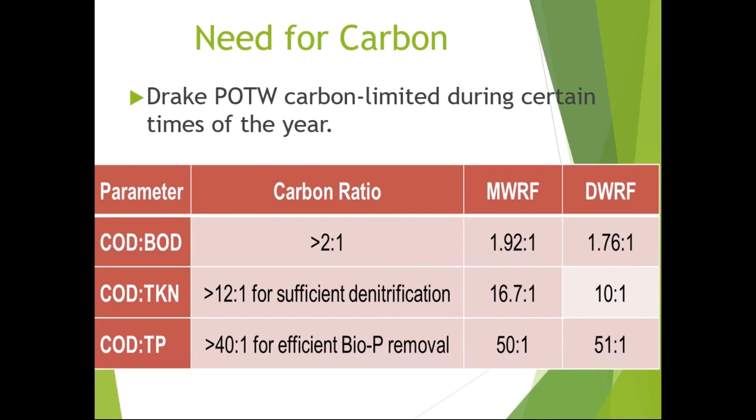And so they knew that they needed carbon in order to effectively meet the BNR requirements to meet the regulations. So they used the pretreatment program to determine whether or not there were industrial users that have high strength BOD waste. They also evaluated what it would take for them to buy carbon sources in order to pay for it. They started to center in on breweries.

So kind of similar to what Jay was talking about, they searched for carbon and did some sampling of breweries at Fort Collins. The type of waste they looked at included post-anaerobic waste, treatment waste, and spent yeast.

They really centered in on trub waste. Trub is a German term which refers to sediments, either coming out of the wort with the boiling, called the hot break, or before primary fermentation cooling, which is called the cold break. You also have trub coming off of the fermentation vessels. So the trub waste is really what they centered in on.

They did find a medium-sized brewery that shall remain unnamed, and contracted with them in order to bring waste to their plant that they could use as a carbon source.

So they also did some bench testing and found out that there are these types of volatile fatty acids, or VFAs, in there that provided really good benefits to the biological nutrient removal process in their plant.

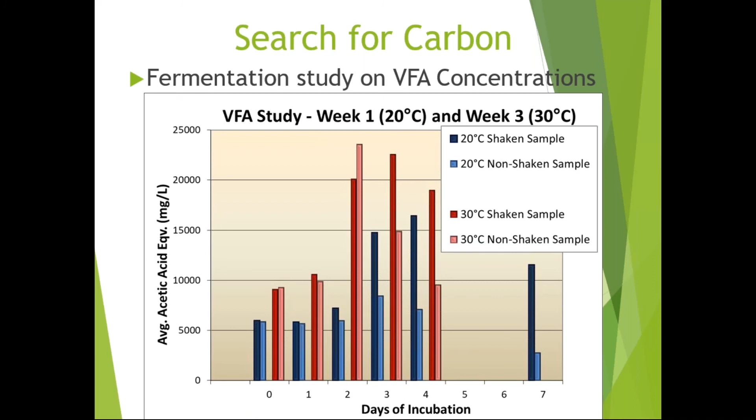So they really wanted to have that acetic acid source, because that is the good candy carbon, as POTWs call it here in Colorado. So they knew that receiving this waste definitely helps with denitrification. It's a good carbon source for these PAOs to help them uptake phosphorus. And they also knew that part of this pilot study is that they need to ferment this brewery waste.

So in order to prepare for this, they needed to, kind of similar to what Colorado Springs did accidentally, find a fermentation vessel in order to surge dose this into their plant.

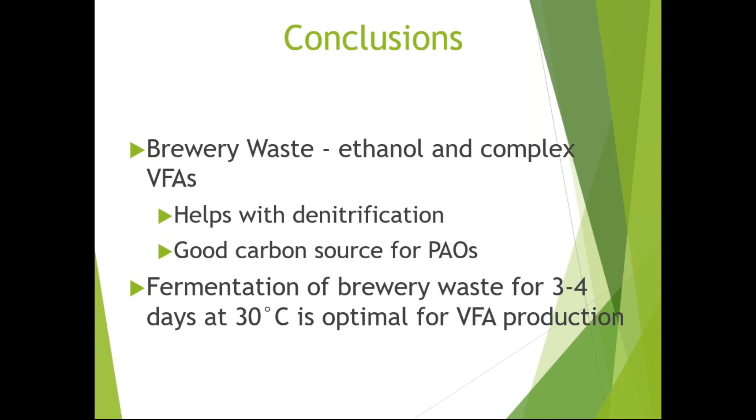So right now they're in the piloting phase, looking at what it costs to have these tanks in order to optimize the fermentation before they dose it into the BNRs. They're looking at surcharge fees, because if these breweries are going to provide this high strength waste, there should be an offset cost with the surcharge fees they currently have for high strength waste. They're also looking at other sources of high strength waste and determining the benefits.

For Fort Collins, my conclusion is that this provides a good benefit to the breweries for surcharging, and it also provides a good benefit for the wastewater treatment plant. So it's a win-win situation.

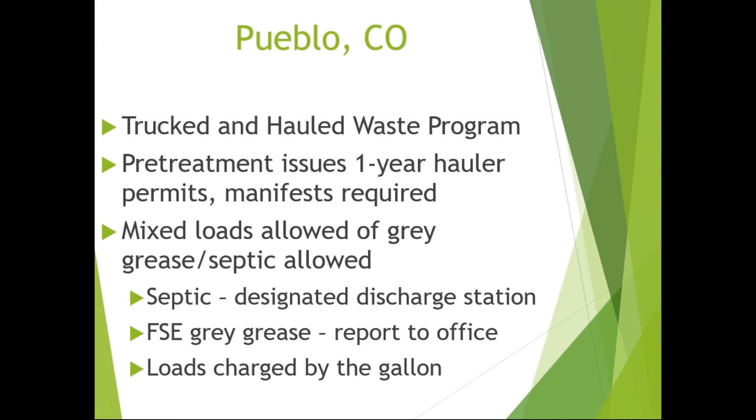They allow mixed loads of gray grease and septic wastes. The septic doesn't cause them problems, but the gray grease is an issue. So whenever they get mixed loads, the truck hauled waste operators, under their permits, are required to report to the office and show the manifest to the operator, who determines on a case-by-case basis whether they can accept it or if it has to go to the drying beds.

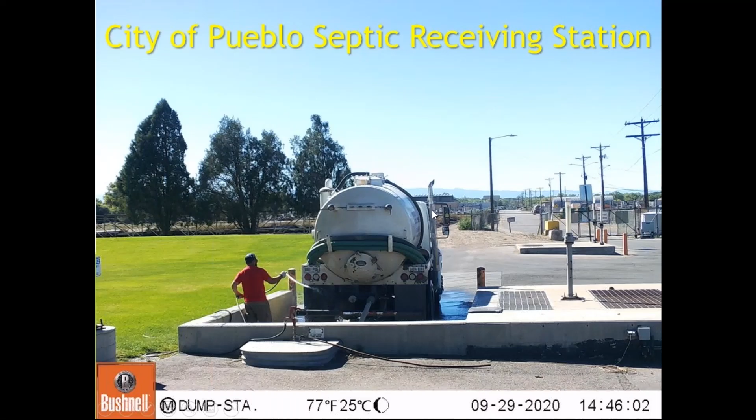Here's a picture of the septic station. It's right in front of the operation, so when they drive in, they can drive up and discharge their septic. And here's a picture of a trucker actually discharging it.

I guarantee you, man, I'm glad I went to college.

This would be a tough job, but it's a great benefit to the community when they're able to bring this waste. Behind this truck, you can kind of see all the drying beds behind those trees—this is where they'd have to go in order to discharge the gray grease coming off of the restaurants.

Pueblo also accepts sand interceptor waste from car washes and automotive shops, and this is not limited to their service area. They're providing the service for outside the city, outside the county. Just east of Pueblo there are a lot of rural areas that may not have a place to go with the sand interceptor or car wash waste.

So, similar to the septic and gray grease, they have to come into the service area, go into the office, provide a manifest, and then they're able to unload into those drying beds. There are 4 cells that Pueblo has, and they charge $60 per load—basically their cost to maintain that and send it over to the landfill. They're not making money off it; they're just providing that service for sand interceptor waste, which is a really great benefit for the community and doesn't impact the plant.

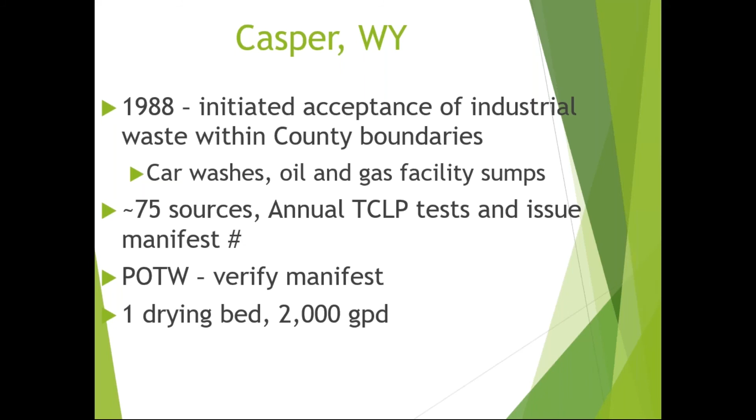They started off with 1 drying bed, and the drying bed had a capacity of 2,000 gallons per day. They've since opened that up to 12 beds and are able to get 12,000 gallons per day. And what they do in those drying beds, I have some pictures a bit later, they're able to rotate these drying beds to dry out and then also to evaporate and then collect them and put them into a truck to send to the landfill.

So in 2019, they accepted 365,000 gallons of industrial waste from the community. We don't know, and again, if they didn't have this available, because this may cause an impact to the plant, but if they didn't accept it, we don't know what would happen to this 365,000 gallons of industrial waste. So it's very successful for them and also for the community.

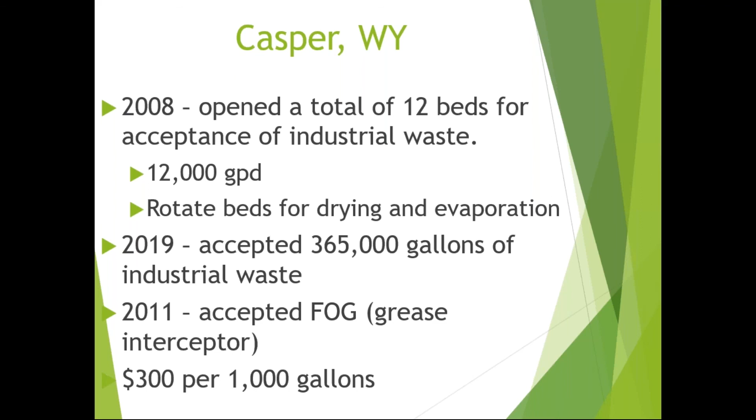In 2011, they started accepting FOG from grease interceptors and opened up the drying beds to accept FOG. They charge $300 per 1,000 gallons in order to accept these types of waste, and again, that's basically the cost for them to maintain it and send it over to the landfill.

So for the oil and grease program, they do accept this grease outside of the county, which is a benefit to the community. They have to come in for a sample and pH test. They have 6 drying beds that they rotate.

The difference between industrial waste and this FOG is that they add lime to stabilize that, and then they allow that to dry and evaporate. Similar to the other process, they mix it, they dry it, and then they scoop it up and send it to the landfill.

And 450,000 gallons of FOG that they receive annually at the wastewater treatment plant. Again, great benefit to the community, because who knows what these restaurants will do individually with that, or the truck haul waste. Where would they go to if they had no chance to go to Casper?

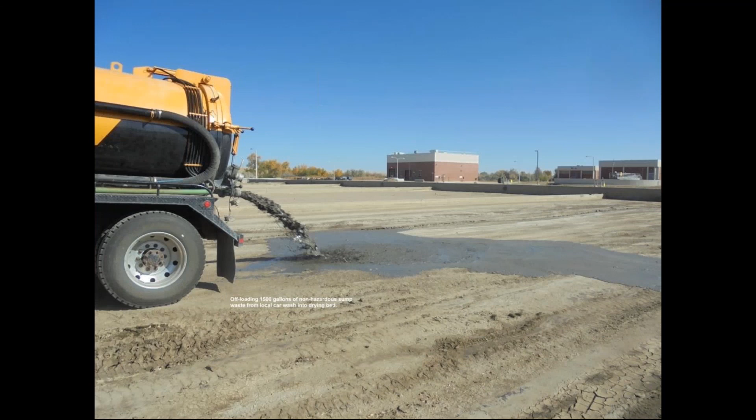This is a great picture of a truck unloading industrial waste to this drying bed. They just drive right in, unload it, and drive right out.

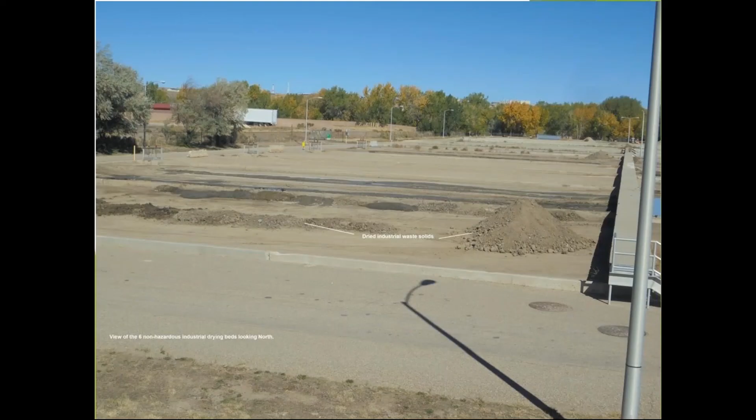So besides these 4 case studies, Jay and I aren't the experts, the people in the community are the experts. There's information at WRF, there's information from consultants that you can use in order to determine what you can do to protect your wastewater treatment plant.

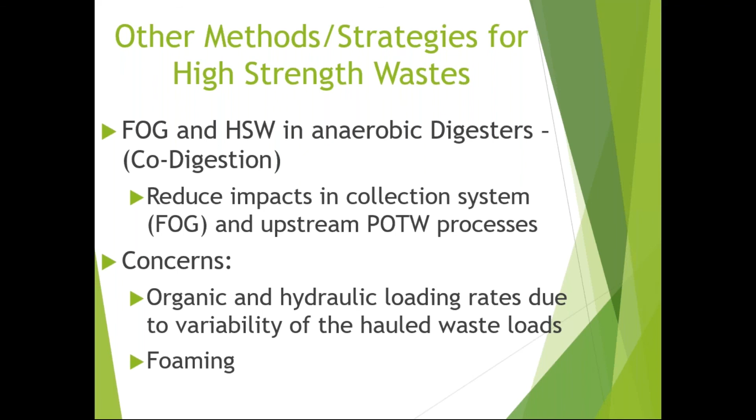But some other methods that I've heard about, and some in Region 8, where they accept FOG and high strength waste into the digesters for co-digestion, that'll help limit that whole liquid stream. They put it right into the digesters. And again, you also have to know what your design capacity and your loading capacity is for your digesters, so you don't contribute to foaming. But there is that ability, if you have digestion, to accept this type of high strength waste.